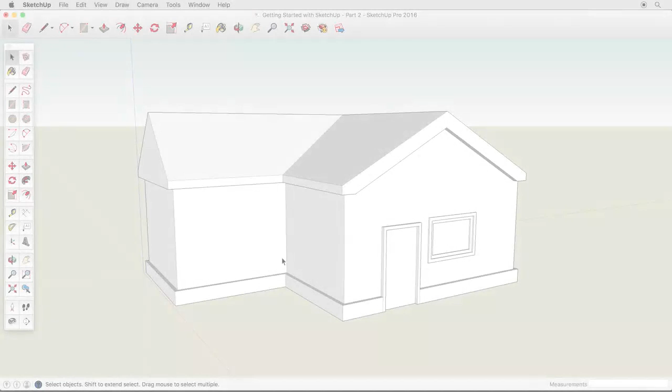Before viewing this video, please be sure you've watched the first Getting Started video. We'll build on the concepts learned there. In this video, we'll create a more detailed house, learning about accuracy, drawing tips, and using Offset and the Follow Me tool. If you don't see the large tool set, go to View, Tool Palettes, Large Tool Set.

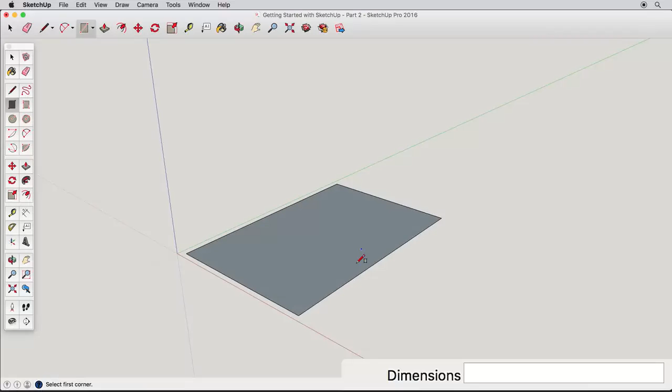To start this model, let's draw a basic rectangle. As we learned before, everything in SketchUp has real dimensions. We need to control what the dimensions are. In SketchUp, to enter dimensions, you start an operation and simply type in the desired dimensions. Try this. Undo your rectangle if needed, then start drawing a new rectangle.

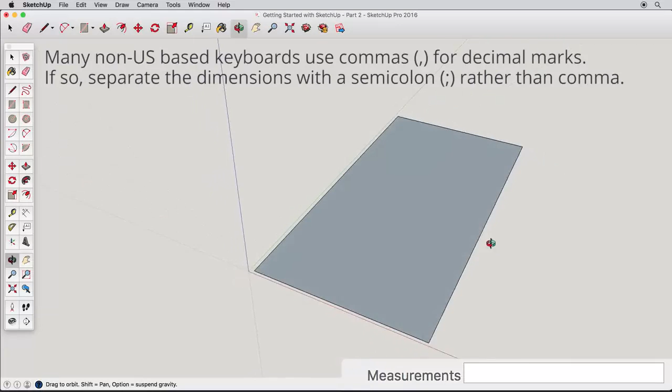Click and release once to start the rectangle, then type 10, apostrophe, comma, 20, apostrophe, and press the Enter key. This creates a rectangle 10 feet by 20 feet. Now, start a line from this corner and draw in the red direction. Type 2M and press Enter. This creates a line that is 2 meters long.

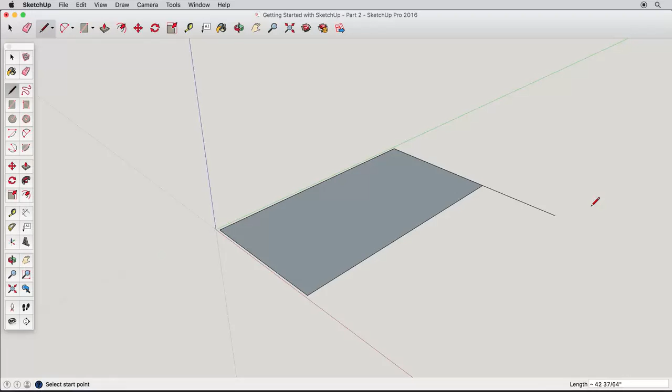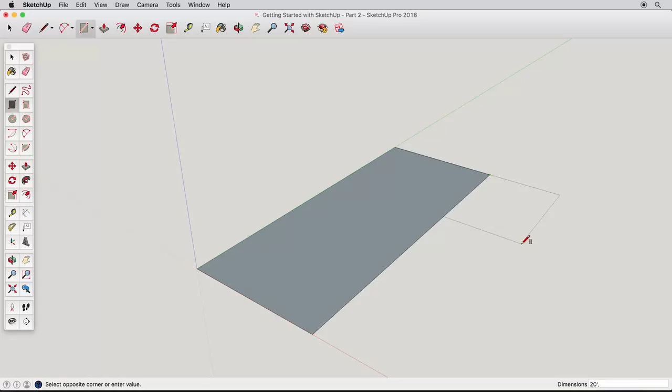Now that you're familiar with entering dimensions, erase any existing geometry and draw a new rectangle that is 12 feet by 30 feet. Now, starting from this corner, draw another rectangle adjacent to the first that is 20 feet by 10 feet. We can combine these two surfaces by erasing the separating edge. There. Now this is one surface that we can push-pull. Start pulling it up and type 10 feet.

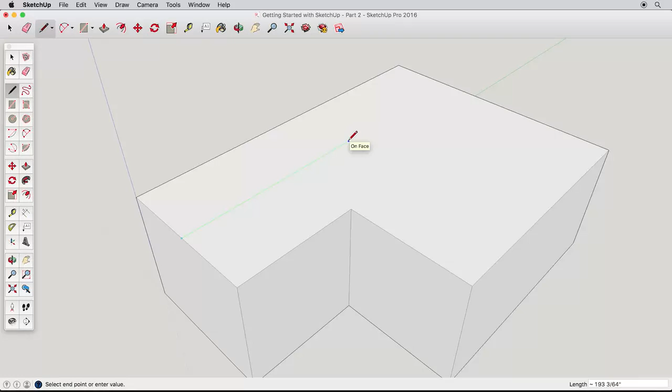To create the roof, we'll use the Line tool and draw all the edges we need before pulling the ridge up. Using the Line tool, find the midpoint and draw back in the green direction. This will be our first ridge, and we need to connect it exactly to the second ridge. To do this, simply hover, but don't click, on the midpoint here, telling SketchUp that we are interested in this inference point.

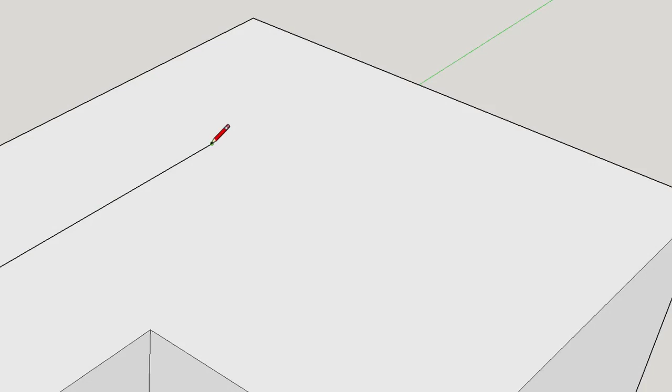Once you see the tooltip telling you it's the midpoint, follow the original green direction, and SketchUp will infer to the midpoint, telling you exactly how far to draw the first edge. Make sure you see both inferences, and click to finish the first ridge. Then, draw the second ridge to this midpoint. Now that we have both ridges in place, simply draw the line where the roof will fold when we move the ridge lines.

Use the Select arrow and click on one of the ridges. Then, hold the Shift key and watch the icon. There is now a plus-minus that indicates that you can add to, or subtract from, your current selection. This allows you to select other entities and deselect them as well while holding Shift.

Add the other ridgeline to your selection, making sure only these two edges are selected. Now you can use the Move tool to pull up the roof. When you're happy with your roof, use the Select tool and click away from your model to deselect the ridgeline.

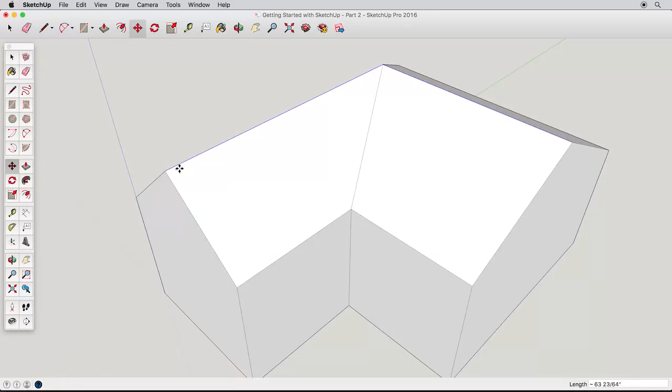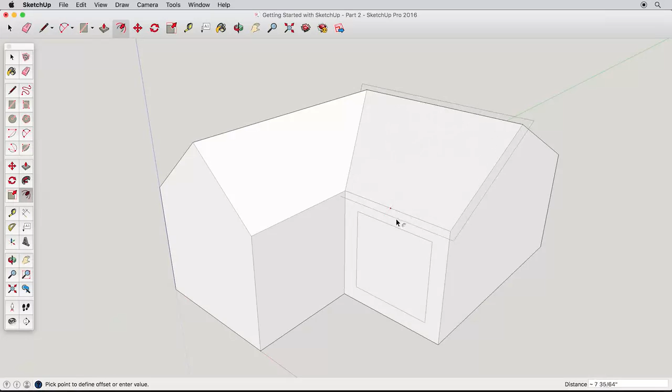Let's explore a new tool, the Offset tool. To see how the Offset tool works, click on the side of our house and pull inwards or away. All the edges of the surface are offset. Click to finish. You can try this on different surfaces to see the results. Or, if you wanted to focus on one surface, you could use the Select tool to pick a single surface. Then, the Offset tool will only work on that surface.

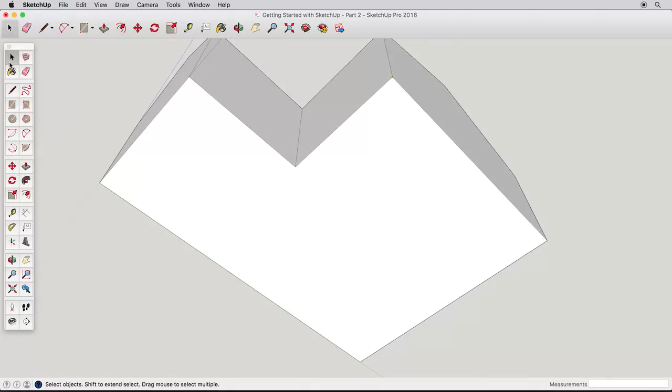Time to get back to our house. So, undo any previous offsets and navigate so we can see under the house. Let's offset the base of this house inwards. Select the bottom surface to focus the Offset tool, then offset the base inwards by 6 inches. Push this new surface upwards to create a roof overhang, but don't push it all the way. Leave a few inches for us to work with later.

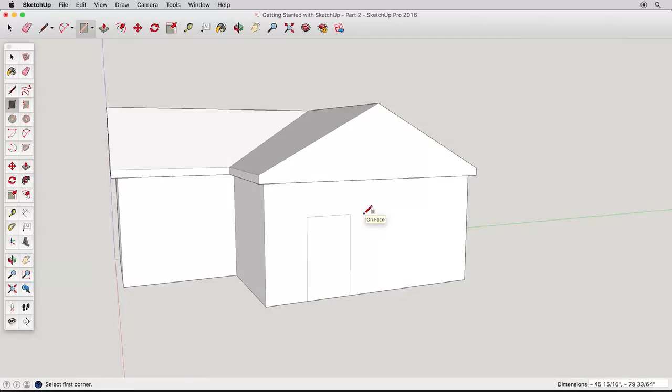Offset can help us add some quick detail to other elements as well. Use the Rectangle tool to create a door and window. Be sure to start the door from the bottom edge. The window is simple. Offset it once or twice, and use Push-Pull to make the window frame.

The door is a little more tricky, however. Offsetting the door creates some extra geometry that we don't need. It's easy to erase these edges, but there's another way to use the offset tool that will solve this problem for us. Undo back to our simple door.

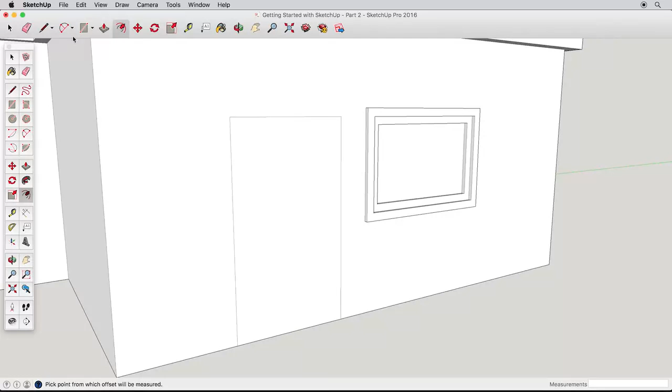Use the Select tool to select one door edge, then, holding the Shift key, add the other two edges. With these edges selected, the Offset tool will focus and only work on those edges, so we don't have any problematic edges below our door and can correctly create the door frame. Pull the door frame out so we can use it in our next example.

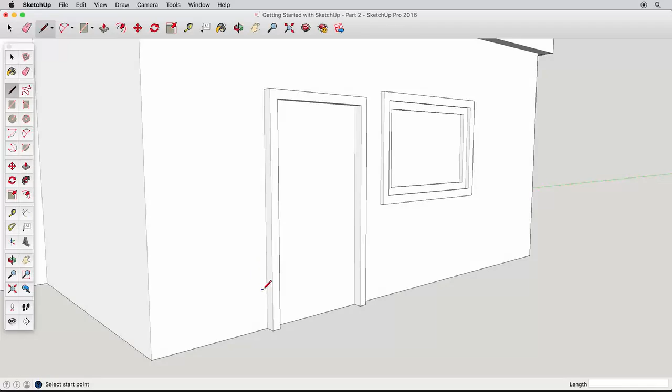Now that you understand the Offset tool, let's move on to the Follow Me tool. Zoom into the lower corner of the door frame we just created and draw a line between these two edges. We could use push-pull on this surface, but what if we wanted this to be trim that turns around this corner? That is what the Follow Me tool will do. Hit the Escape key to cancel the push-pull, or undo it.

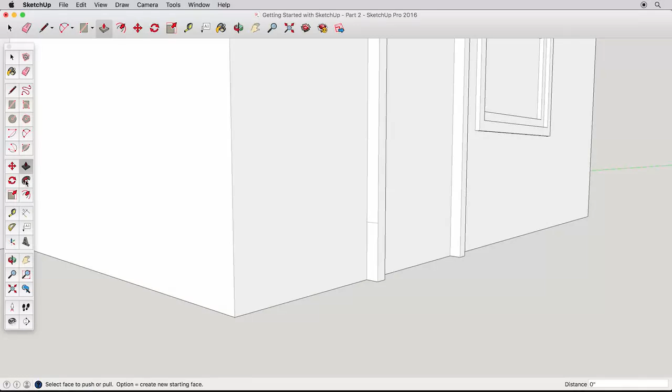Then, select the Follow Me tool and click once on our trim surface. Pull along this lower edge and it looks similar to push-pull, until you meet the corner and continue in a different direction. You can pull upwards or around the corner and follow any joining edges, and click to finish. The key to Follow Me is having a continuous edge to follow.

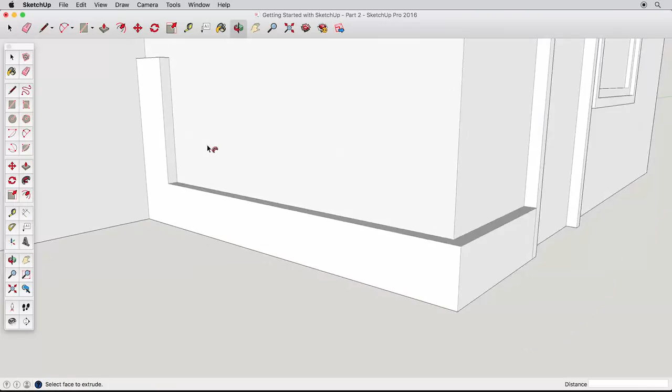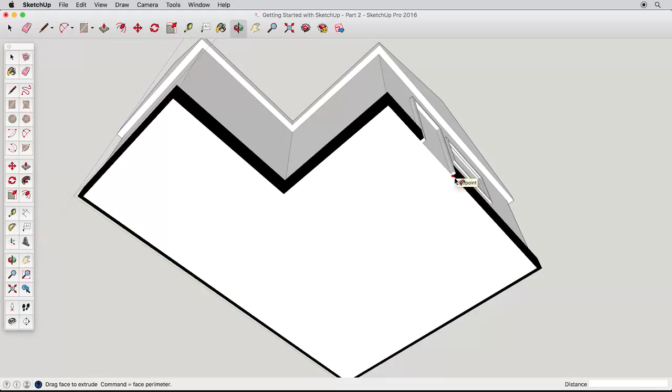Let's undo and navigate so we have a full view of the base of our house. Now use Follow Me to start following the trim all the way around the house until it meets up with the other side of the door. Just carefully follow around the edges and click to finish when you reach the inside of the door. Sometimes it's tricky to end the Follow Me tool at the right point, but a more sure way to use the tool is to pre-pick the path we want to choose.

Undo the Follow Me action we just finished, and this time use the Select tool to choose the path. Hold the Shift key down like before, and select all the edges that go around the house. But only the edges, and make sure they're all connected or the tool won't work.

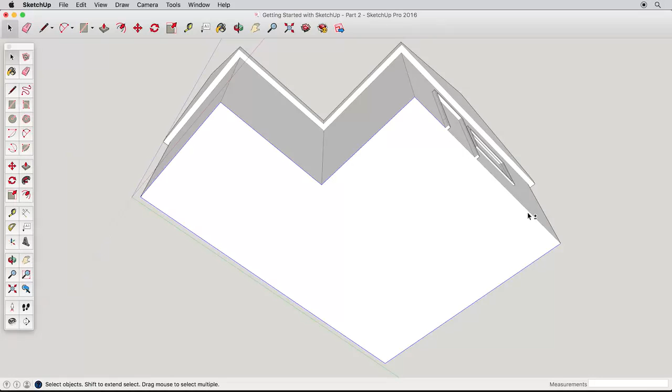With our path selected, choose the Follow Me tool. It may look like we lost our selection, but don't worry. Just click on the trim surface to pull it around the path. If your example doesn't work, try again, and make sure you pick all the edges and have nothing else selected.

We're only scratching the surface of what can be done with the Follow Me and other tools, so please look into some of our other videos and learning resources to explore these tools to their full extent. To finish our house example, let's turn our attention back to the roof and some drawing aids in SketchUp.

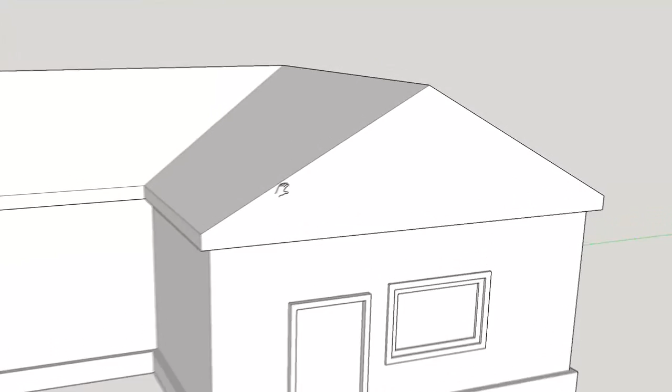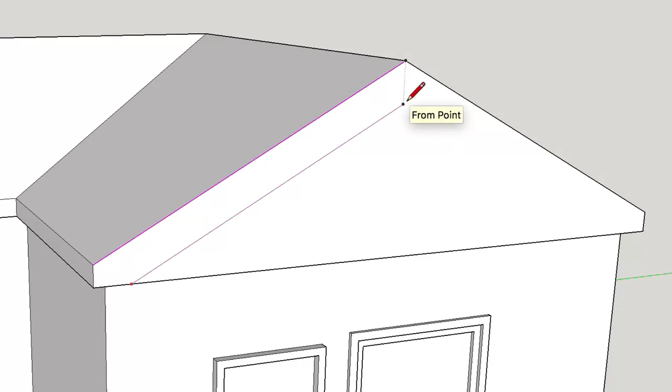Use the Line tool and start drawing a line from this edge. Now hover over the roof edge for a few moments, and as you continue to draw, you'll see a new inference that is purple in color and parallel to the edge we just hovered over. We can easily find out how far to draw this parallel edge by hovering over the ridge point to focus attention there. Then, as we come back to drawing our original line, SketchUp will tell us where these points meet.

Click to finish that edge, then continue drawing and hover over the far roof line to tell SketchUp that we are now interested in that edge. SketchUp will now show us the parallel inference to that edge, and we can follow it down to meet up with the lower on-edge inference point.

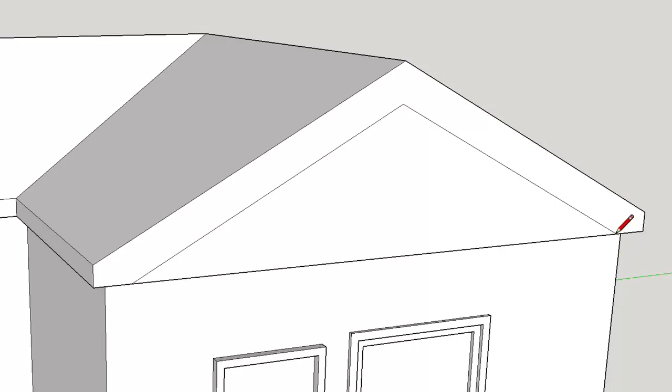At this point, you can keep practicing on your own. In the next video in the series, we'll create an interior room and fill it with items from the 3D Warehouse.